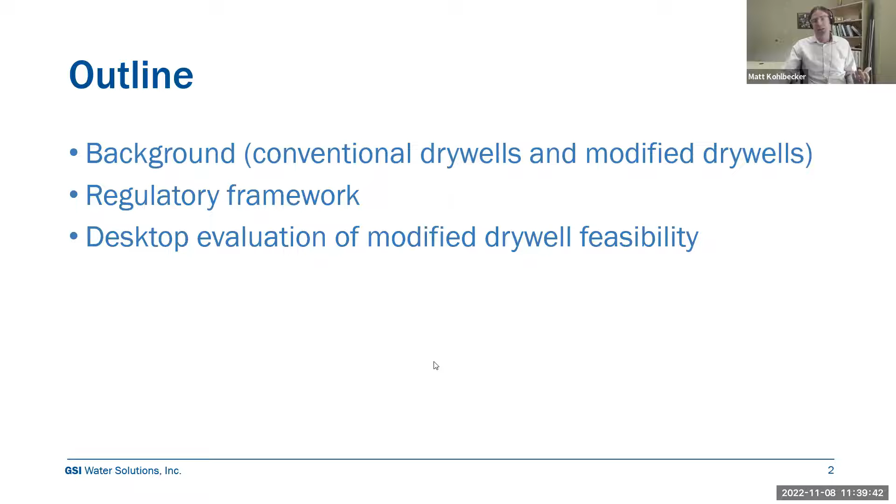I want to talk a little bit about the regulatory framework next. Whenever we're talking about modifying a drywell, let's think about what the regulations might have to say about that modification. Then we'll get into the meat of the discussion and talk about the desktop study that the city did to look at the feasibility of these modified drywells. And then we'll dive into the case study where they actually constructed one of these and had some success. Finally, we'll talk about conclusions and recommendations.

There are a couple of key characteristics when it comes to these conventional drywells. Number one is that they are a bit depth limited - again, 40 feet is about as deep as I see them.

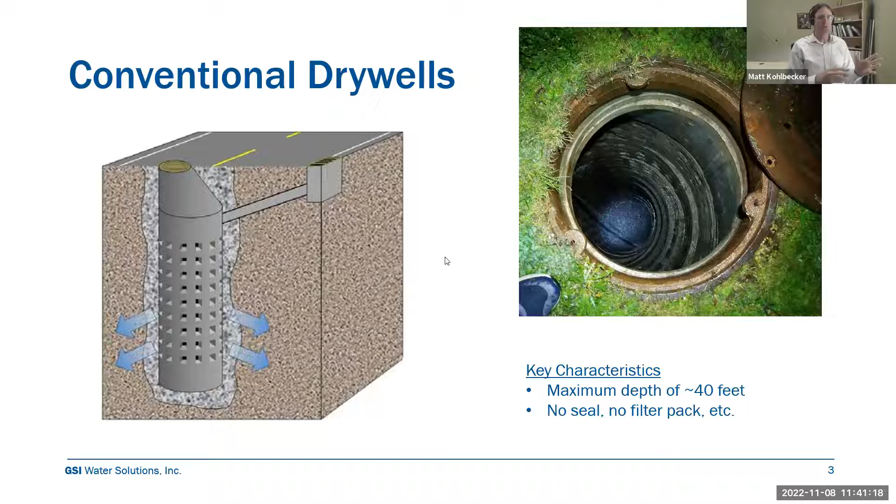And number two, these are basically concrete rings shoved into a hole in the ground. You don't get filter packs or seals or some of the more sophisticated construction techniques that we see around water wells.

So conventional dry wells are very common in the Pacific Northwest, especially out west as well. What we're looking at here on the left-hand panel is all of the public UICs in the city of Portland. The city owns and operates about 9,600 public UICs, and they estimate that for every one public UIC, there are 2 private UICs. So some quick math, we're looking at about 30,000 dry wells in the city of Portland.

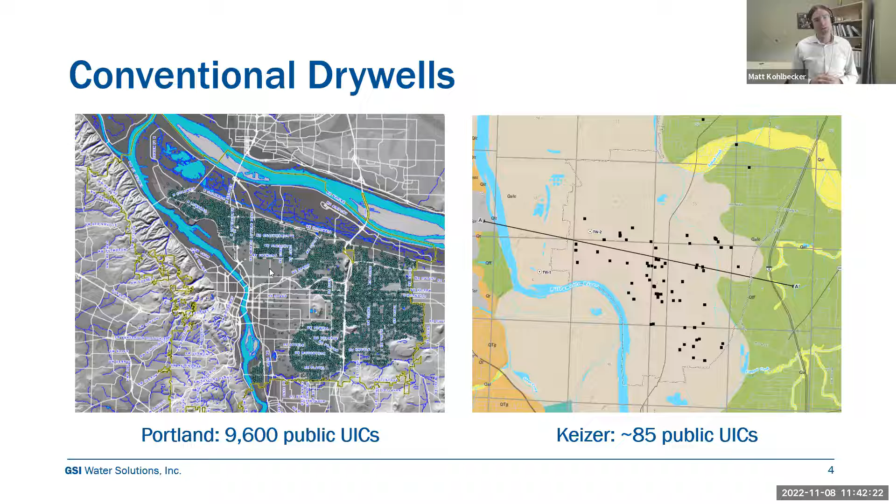But they're also used throughout the state. So the city of Keizer, a little bit north of Salem for those not familiar, has about 85 of these conventional dry wells. So very common. The conventional dry well works very well. Given our geology out here, we tend to have some very permeable gravels near surface, and most of the time you can stick one of these dry wells in. They tend to be pretty cost effective and solve your stormwater management situation at your site.

But conventional dry wells don't work in every case. There are some situations where these modified dry wells might make more sense, and one of those is shown. We're looking at a cross section here. This is down in the Pleasant Valley area of Gresham.

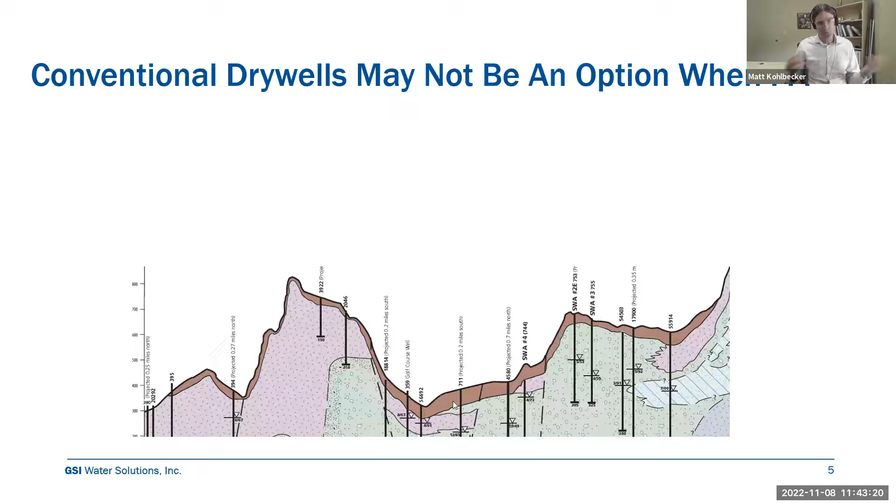This is south of the city where some new development was occurring. Basically the geology down there is some gravels and basalt capped by anywhere between 60 and 100 feet of low permeability silt. So stormwater management is a real challenge here. The LID doesn't work too well, and the conventional dry wells can't get through the silt because we can't get them deep enough. So this is a situation where if we have the ability to go deeper and tap these gravels beneath the silt, then we could infiltrate some of our stormwater.

And this was actually the situation where the city and I started talking about what maybe a modified sort of design would solve some of our challenges in this area.

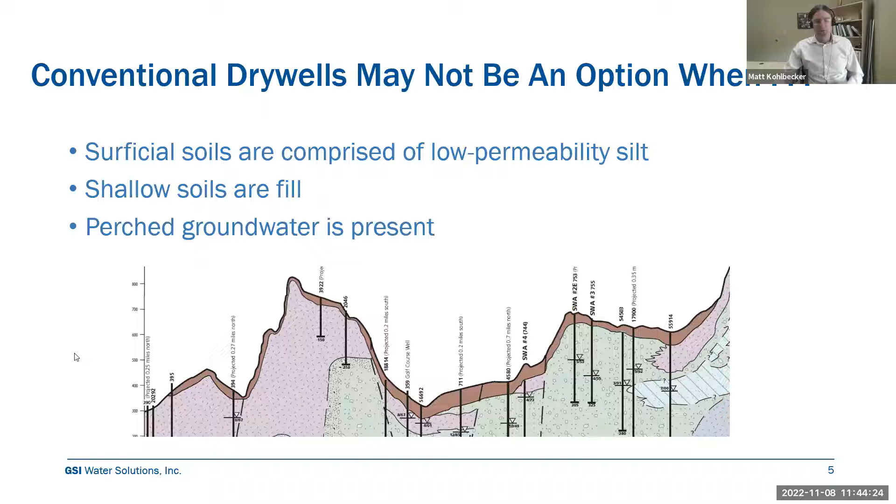Other times when conventional dry wells may not work: if the shallow soils are fill, there are some jurisdictions where there are prohibitions against infiltrating through fill material. And finally, if there's perched groundwater present, that also can be a situation where shallow or conventional dry wells don't work. We'll be talking a lot about that in the case study, so I'm not going to go into it too much here. I'll just pause for a second in case anyone had any questions.

All right, let's talk about modified dry wells. What do I mean when I say that? There are a couple of things. First of all, these are dry wells that are deeper than that 40-foot limit for conventional dry wells. And there are kind of 3 things that depth gets you. Number one, you're able to tap into deeper permeable gravels not present in those upper 40 feet.

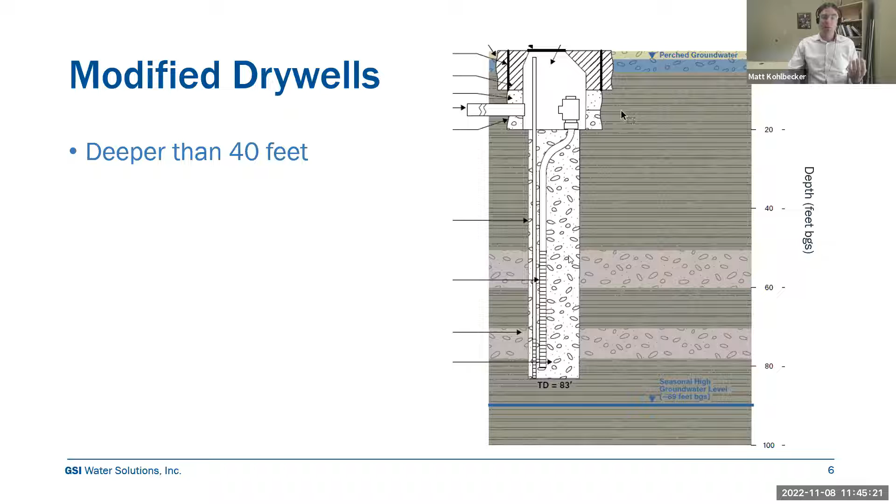The second thing these can buy you is you can bypass shallow perched groundwater. This is the situation in Gresham where we have some perched groundwater, and what we're able to do is seal that off and infiltrate into unsaturated soils below it. We'll go into more detail later. The third thing this gets you is you're able to generate more head, or create more head, in your dry well during infiltration.

So infiltration, the formula for that is Darcy's law. We have Q, which is your volumetric infiltration rate, and it's a function of your permeability, which is a property of your soil, the area — the area of your dry well, or the sidewalls and bottom of your dry well — and also this head gradient. So the more head you can build up in your dry well, the greater the exfiltration rate from the dry well. One quick caution I'd mention is that this is a theoretical relationship.

So there's not a one-to-one relationship between your head and your infiltration rate. There are efficiency issues that will tend to reduce your infiltration rate as your head is increased proportionally. But you can still get more infiltration with a higher head.

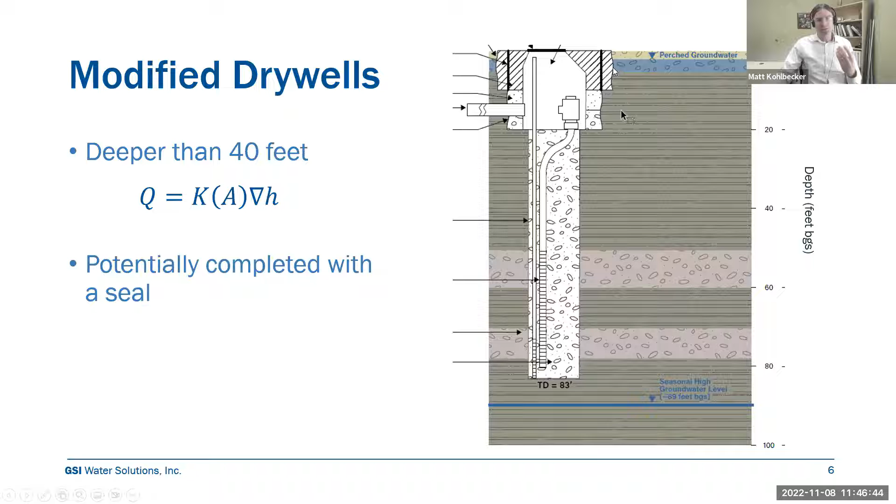Finally, or number two, when we talk about modified dry wells in addition to the depth, is this ability to put a seal in, which can seal off perched groundwater. So that's the background. I'll pause real quick here just in case anyone had any questions before we dive into regulatory framework.

Matt, there is a question. I don't know if you can see that. It says: what is the typical regulation, state or other jurisdiction, regarding pre-treatment before discharge into dry wells?

So that's a great question.

Could I answer that in about 3 slides from now? Sure, I promise I'll answer that. And I can't see the question, so thanks for reading that.

I appreciate that. Okay, so drywell regulation. The first thing, just as an upfront caveat, is that stormwater UICs that infiltrate stormwater are called Class 5 UICs under the Federal Safe Drinking Water Act. So everything I talk about today pertains to Class 5 UICs.

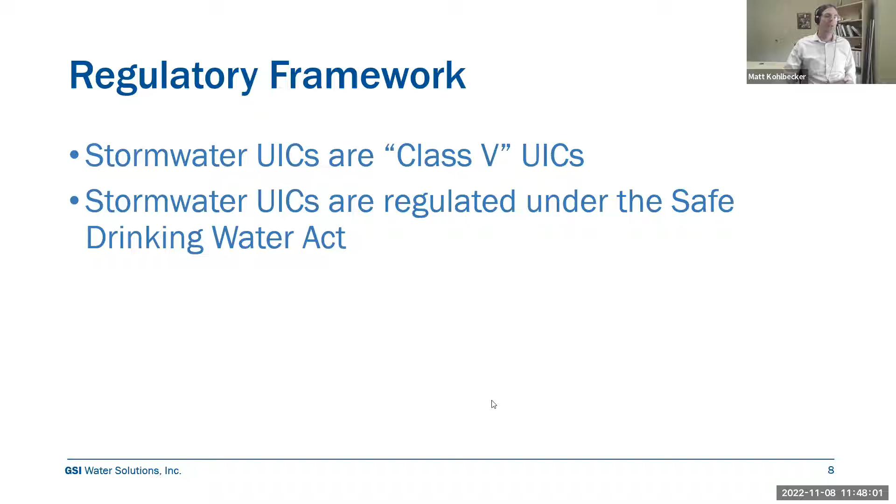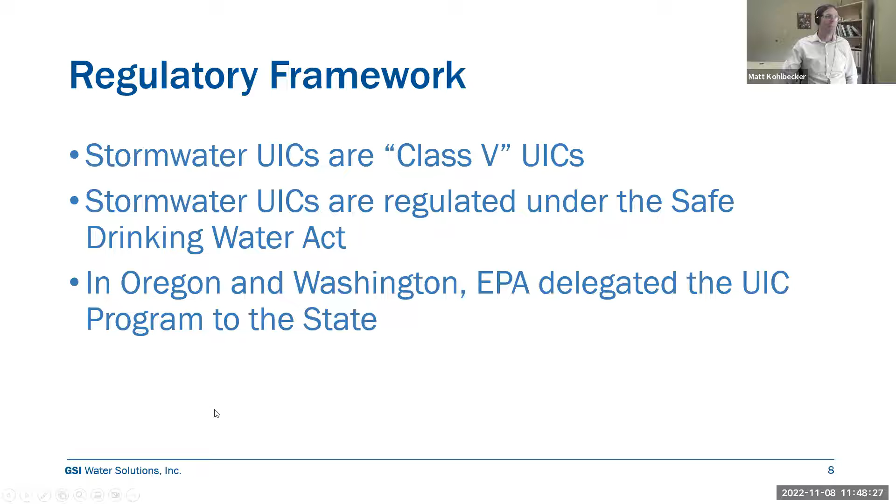These UICs are regulated under the Safe Drinking Water Act by EPA at the national level. However, in Oregon and Washington, EPA has delegated the UIC programs to the states, so Oregon and Washington have adopted their own UIC regulations. Oregon adopted theirs in 2001. Not sure about Washington, but you have to treat each state separately when it comes to the regulatory side. So first I'll talk about Oregon.

There are a few regulations to keep in mind when you're thinking about these modified dry wells. First of all, there's a depth limitation. The dry wells cannot be deeper than 100 feet. A little caveat to that is there are 2 ways to have a dry well authorized.

One is rule authorization. That's how 99% of UICs in Oregon are authorized. All that means is that your dry well meets the language of the Oregon administrative rules. If you're rule authorized, you're limited to that 100-foot depth. If you have a permit, then you could theoretically be deeper than 100 feet.

The permit, there are a handful of those, about 40 or so in the state. They're really tailored for jurisdictions and businesses that own several tens to several thousands of UICs. The application fee, I believe, is north of $15,000. So just figure you're going to probably be limited to 100 feet.

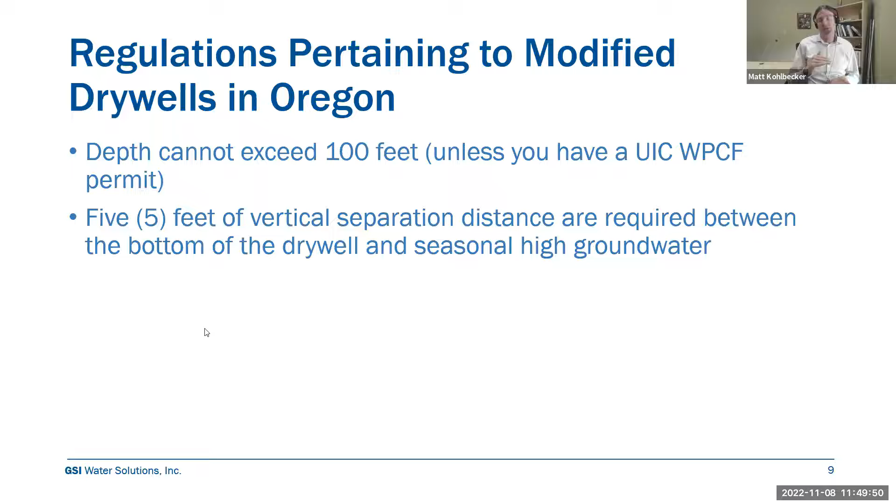Also, these modified dry wells need 5 feet of vertical separation distance between the bottom of the dry well and seasonal high groundwater. This also applies to conventional dry wells. And as with conventional dry wells, you cannot have a dry well located within a well setback, which is 500 feet or the 2-year time of travel for a water well.

Now I'll answer the pre-treatment questions. In Oregon, I think Kevin Weberling, who's the UIC hydrogeologist, I'd invite him to jump in if he wants. But I would say in general in Oregon, we don't have a prescriptive framework like you do up in Washington. Pre-treatment requirements are listed on rule authorization forms. It could be as simple as a sumped catch basin, or it could be as complex as bioswales and filters upstream of your dry well.

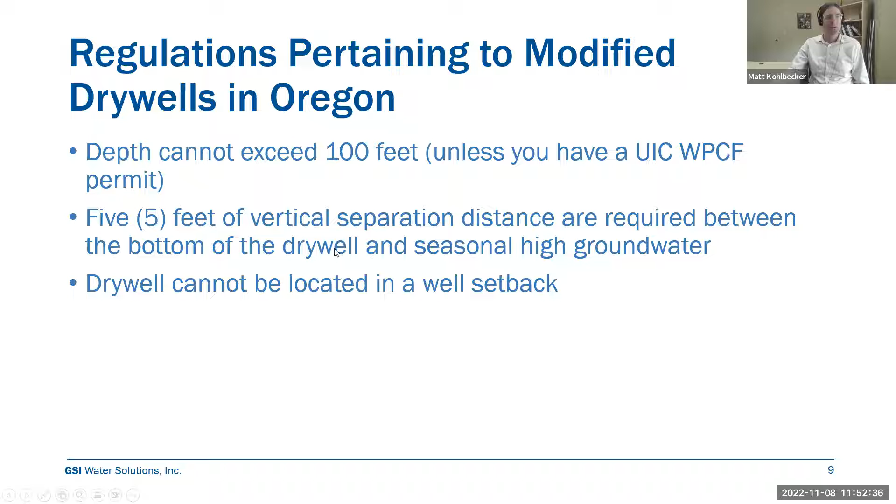Thanks for adding that, that's absolutely right. Okay, moving on to Washington. I'm going to kind of fake my way through Washington, it's a different state with a different set of regulations. If I were ever to do a project in Washington, I would be looking for someone to help me out, someone with local experience. I would characterize the regulations in Washington as more prescriptive, and these regulations are found in the Western Washington Stormwater Manual.

There's a hydrogeologic study that's required just to confirm that groundwater won't be contaminated. The vertical separation distance requirement is larger, so it's more than just the 5 feet, I want you to have 15. There are also some sealing requirements with regards to impermeable layers, and several other minor requirements. I think these are the big ones.

Okay, regarding pre-treatment in Washington, I'm probably not the best person to answer that. I am aware that it's much more prescriptive than it is in Oregon, and there are certification programs you have to be paying attention to. But like I said, if doing a project in Washington, I'd have someone else to help me out with this sort of stuff. So I don't know if that answers the questions or not.

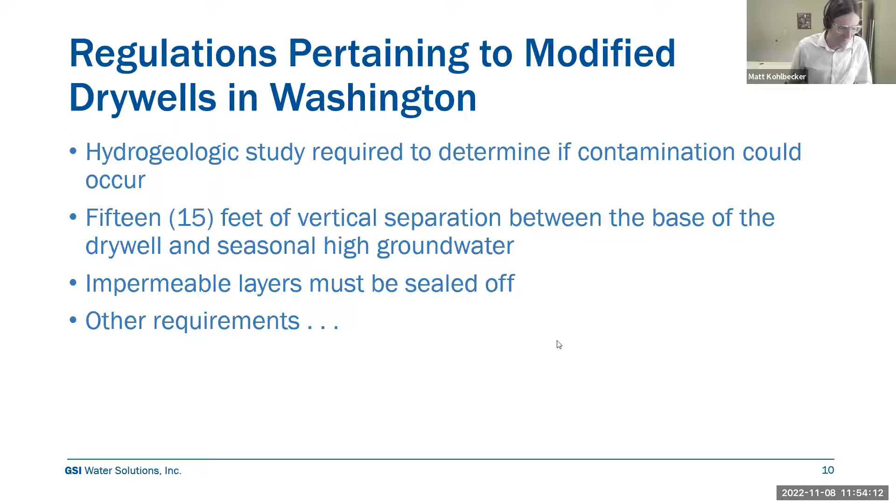Okay, so that covers their regulatory framework. Any other questions about that? All right, I'm not hearing anything.

So let's move on and talk about the desktop evaluation. The first step, really, before investing in this sort of dry well, is to do a desktop evaluation and assess: is this feasible, and what kind of infiltration rates do you think we could get? So I'm going to talk through that. There are really four components to the desktop evaluation that we did with the city.

We looked at the geology of their study area, and we'll talk about this a little bit later. Basically, the city had a study area where they had some challenges related to their MS4 capacity. So that's kind of where we were looking, and we looked at four things: the geology of that area, the hydrogeology—meaning the depth to groundwater in that area—and also the permeability of the subsurface soils.

We looked at regulatory aspects, and we also looked at cost aspects. And the outcomes of the desktop study are, like I said: number one, is it feasible? And what kind of infiltration rate do you think you'd be able to get?

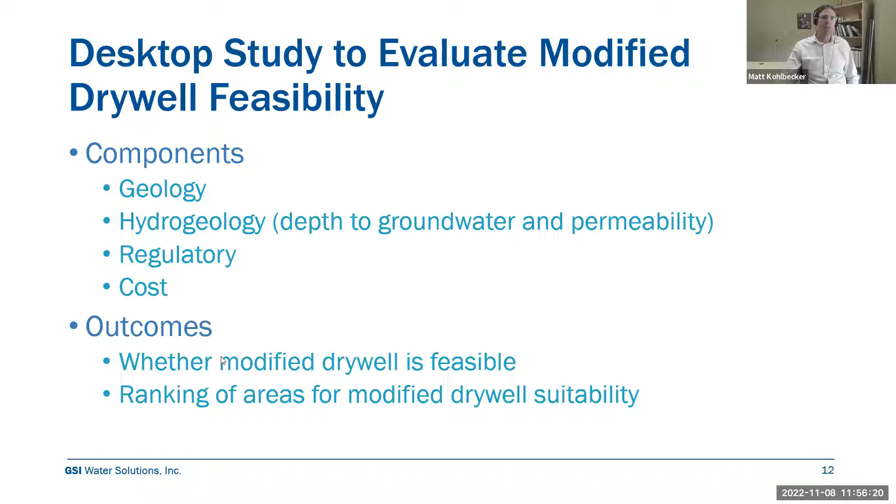So we'll step through this desktop study. This is the study area in Gresham, highlighted in yellow. And we have several dots and lines basically showing stormwater infrastructure. The green lines are the MS4 infrastructure within the study area.

You'll see we also have these diamonds—those are UICs. There's also LID in this area, which is not being shown. There are also several borings in the area, so the city's been kind of poking around here for a while, trying to come up with some infiltration solutions. So we had some actual site-specific data that we could use.

So what's the issue? The issue is that this MS4 system is basically at capacity and it needs some expensive, costly upgrades. So what the city was looking for is: are there other solutions that would be more cost effective that could allow us to handle or overcome these stormwater management challenges? As I mentioned, there are dry wells in the study area over here and LID, but they're not particularly effective because there's perched groundwater in the study area.

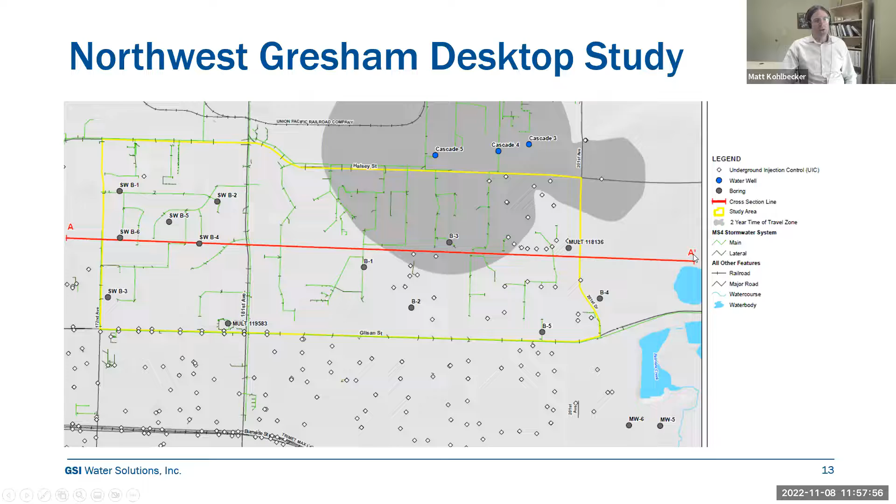So we're going to look at a cross-sectional view through the study area from A to A prime. And what we have in this area is two geologic units. We have the Troutdale Formation—gravels and silts, and other materials that came off the Cascade Mountains and out the gorge and were deposited a few million years ago. And then we have these flood deposits on top of those.

The flood deposits are, say, 15 or so thousand years old. Those came out of the gorge due to the bursting of an ice dam on Glacial Lake Missoula. The difference between these two units—why does this matter? Well, it matters because the Troutdale Formation is much older, highly weathered, and low permeability, whereas these flood deposits are high permeability and younger.

So what happens is water infiltrates into these flood deposits—partly from dry wells and also just infiltration from precipitation—and it accumulates on top of the Troutdale Formation. And so any dry wells that are being installed in this study area are basically completed in the perched groundwater, and they don't function very well.

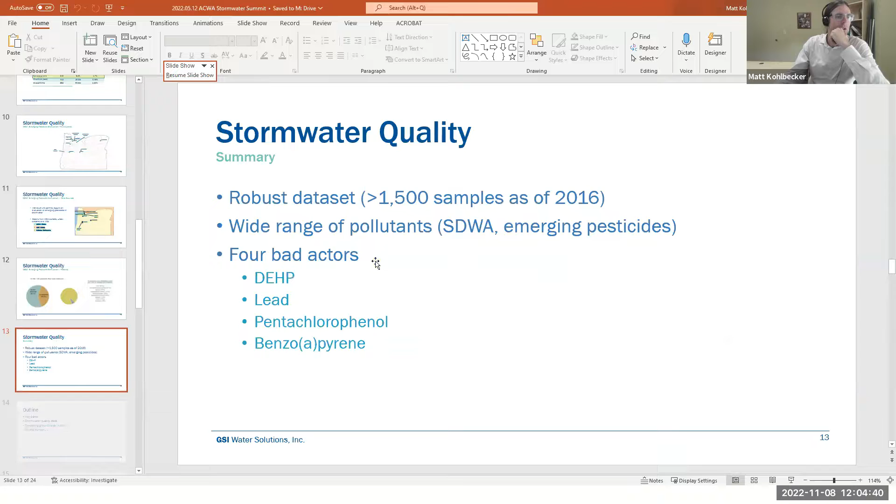Now, as far as data, let me see if everyone could bear with me for just a second. I have a few slides that review some of these—I just need to find that. This might be a good slide. Okay.

Let me talk about City of Portland first. There are about 4 or 5 situations where groundwater quality is being monitored down gradient of UIC areas to confirm that the anti-degradation rules are being met, and Portland is one of those. The city operates and owns monitoring wells completed in first encounter groundwater throughout its jurisdiction, and these are located down gradient of the UIC area.

I believe there are 8 of them, and the city's been monitoring groundwater quality in those since at least 2008. They sample for everything under the sun, and basically they don't see the pollutants that we find in stormwater in the groundwater. The pollutant in stormwater that is most mobile and most common is pentachlorophenol—it's a wood preservative on utility poles, so that's kind of the marker for stormwater. They've only seen one sample collected from one of these wells that had PCP in it; it also had some petroleum hydrocarbons and other stuff you don't normally see in stormwater. So there's something going on at that well, but it was a one-off.

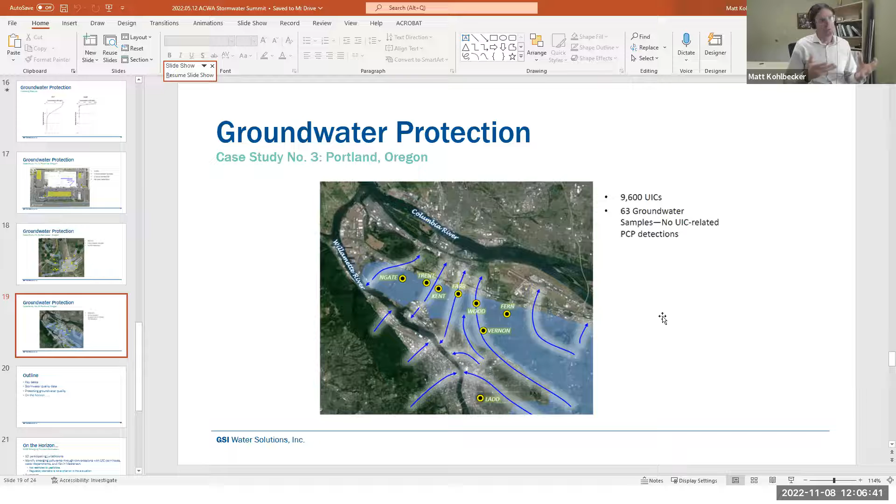I do want to caveat that for some of these wells, there is quite a bit of vertical separation distance, and I think the minimum vertical separation is about 20 feet. So that's the monitoring well network they have. Another interesting example I'll share is over in Hermiston. DEQ did a study of groundwater quality in Hermiston—I want to say that was in the early 2010s, maybe the late 2000s.

In this study, no PCP detections were found. So again, there was no evidence of stormwater from these UICs impacting groundwater.

I think there are a couple of reasons for that. Number one, the concentrations of pollutants in stormwater tend to be very, very low, so they tend to be degraded by bacteria in the subsurface, adsorbed to soils, and also have their concentrations reduced by dispersion. That's the main reason we don't see those impacts. But where we do see impacts, it's from spills, and I think that's a nationwide phenomenon.

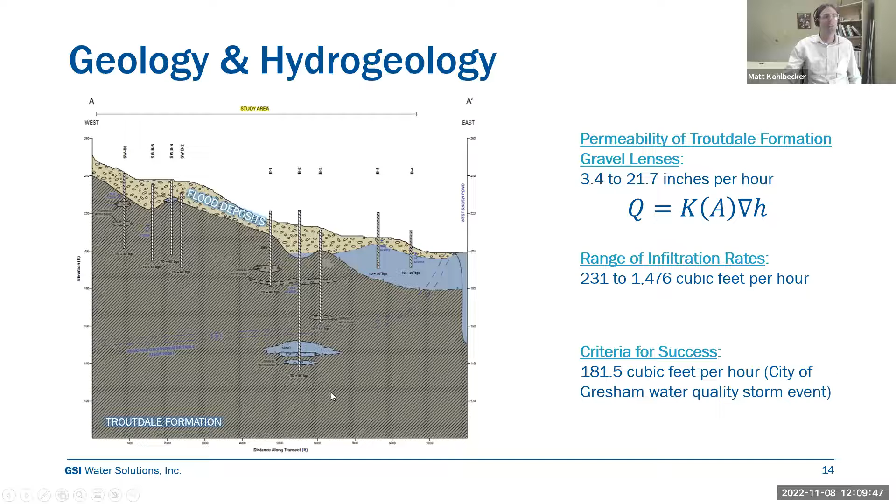So with this desktop study, we look at the geology and hydrogeology. We think we can meet our target of 181.5 cubic feet per hour based on the information that's out there. Another thing we look at is where in the study area we should put this. We came up with a relative map of infiltration potential, based on the thickness of unsaturated soils. We looked at the depth of groundwater and the thickness of the Troutdale Formation in this area, and came up with this map.

The thicker your unsaturated zone, the more area you have, the more water you're able to push out. The take-home message was that the depth to groundwater gets deeper as you move to the west. So if we stick a dry well over here in the west, we have the most unsaturated zone, and we're going to have the highest potential of hitting our target. So the drywell ended up going over in this area by SWB5.

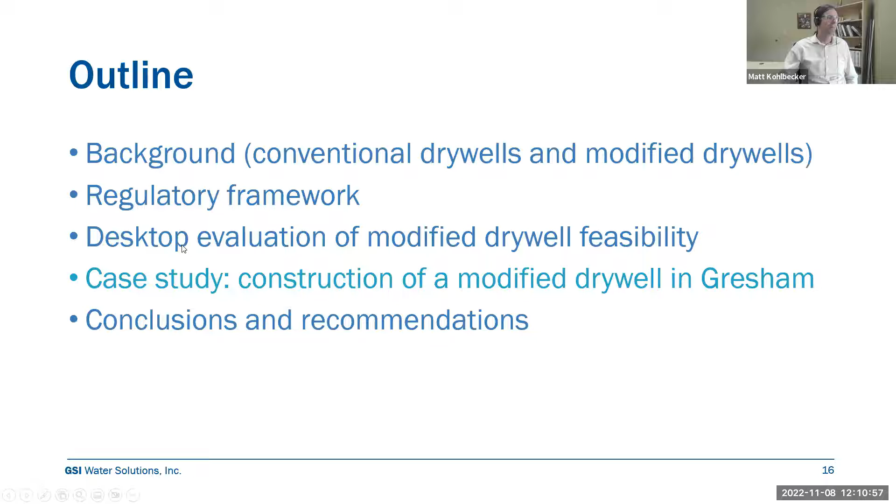Okay, so that's the desktop evaluation, and now I can go through the actual construction of the drywell. We looked at a couple different drywell design options. This design on both of these were bid—we developed bid specifications for the city, and contractors bid on both of these designs. The design on the left is actually a proprietary design that Oldcastle, formerly Torrent Resources, has developed. Catherine Thompson's on the phone, and she can chime in at the end in case I get any of this wrong. So that's one design, and another design we call the monitoring well design.

The big difference between these two comes down to storage volume. This is a 4-foot diameter lower borehole—they could probably even go bigger than that. There's a lot of storage in the pore space where water can slowly exfiltrate from those pores. Not as much storage volume in this design. The maximum size for this, while still being somewhat cost efficient, is about 32 inches. So not as much ability to store your infiltrating stormwater.

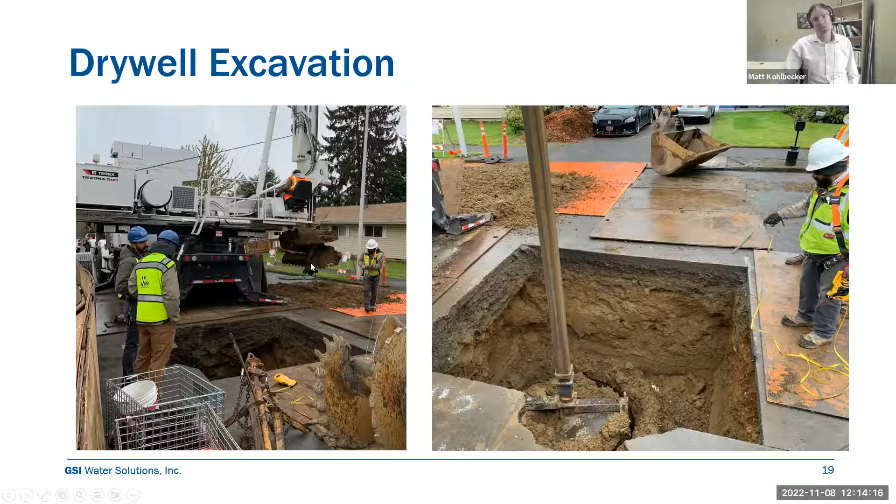This isn't going to work when you run into wet soils, so that's why we had to deal with the dewatering.

These are some of the soils that we saw. This is very typical Troutdale formation. You can probably tell from the photo that we have gravels here, but there's a very high content of fine material, highly weathered—you can see the iron oxidation. This isn't taking that much water. When you get a little bit deeper, though, we're at 60 feet here, with a much lower fines content, and this is one of those lenses where you really get your permeability and your ability to infiltrate water.

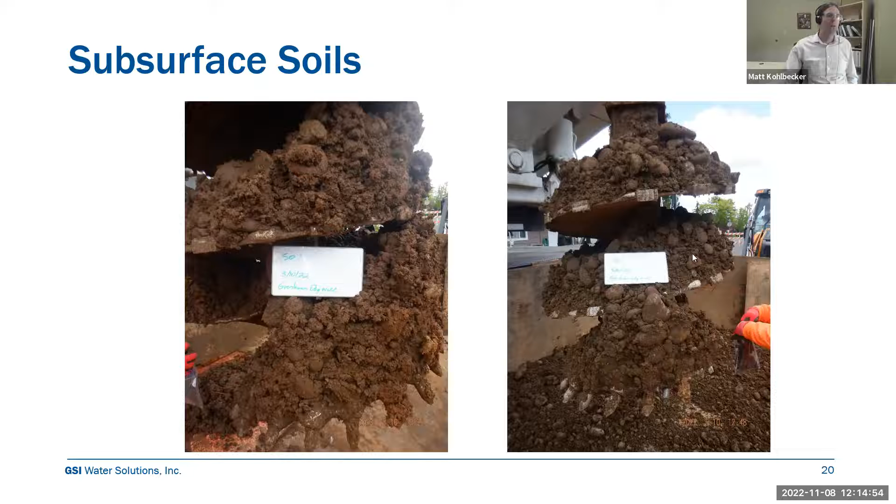Step one was to drill our upper 6-foot diameter borehole to about 20 feet below ground. That took us about 29 days—we ran into some equipment issues, so that's why it took a little longer than expected. Once we drilled that upper borehole, we keyed it into the Troutdale formation, since we had a nice good upper silt layer we could key the seal into. Then we put our pipe in and set the seal.

Once that is set, step three was drilling the lower borehole with 4-foot diameter augers, getting down to 66 feet. That took us 13 days to do. Then well construction was about 2 days—that's when we're actually putting the gravel backfill and the injection line into the dry well. Finally, we did our testing, which is on the next slide.

So here we are on our testing. We put a transducer in the well so we could record the water level elevation. City of Gresham standard testing protocol is to start the test at 300 gallons per minute. We knew we weren't going to get that based on the soils we saw, so we started off at about 200 gallons per minute and then decreased it down to 150, which is about where we calculated our stable flow level. Our calculated flow for this modified dry well is 1,428 cubic feet per hour, which exceeds the target by quite a bit. So it was quite a success. I do need to caveat that that's a raw flow rate—it doesn't have any safety factors, and it does not account for decreased performance over time. But yeah, quite a success.

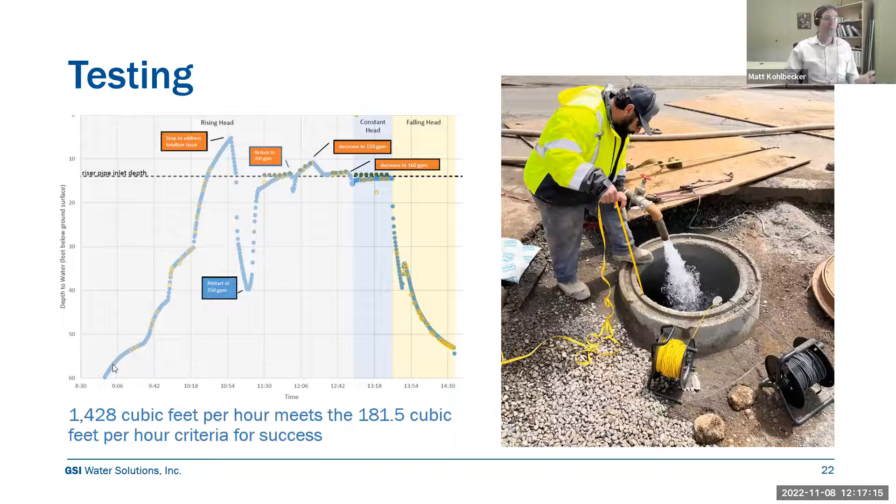Matt, just a quick question came in—sequentially, where this might fit in. There was a question that said in Washington, UIC wells have been built before they have been registered. In some cases it involved a denial of the rule authorization. Is this a problem in other states as well?

So in Oregon, the regulations also require you to receive your rule authorization before constructing the dry well. Carry on—thank you. Yeah, and it's a good idea because that way you minimize issues like construction of a dry well that then doesn't meet rule, and then you're having to figure out how to handle that.

So I have a quick slide on groundwater quality protection. At GSI, we work mostly with municipalities—that's our client base. A lot of times, especially with smaller cities, the stormwater folks are sitting right down the hall from the folks providing drinking water using groundwater as a source. So I like to approach these deeper drywell projects with groundwater quality protection in mind.

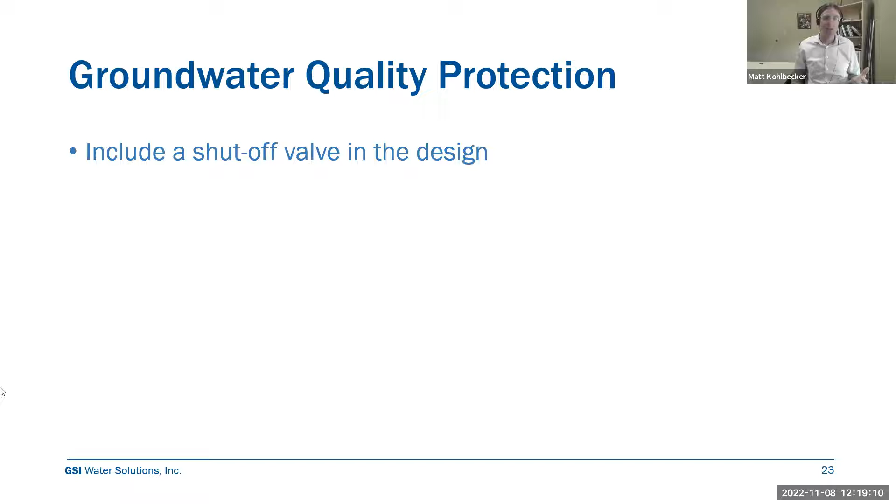And there are a few things that I recommend, and the city went ahead and did these. Number one is to include a shutoff valve in the design, so if there's ever a spill or something like that in the area, you can shut off flow to the dry well.

Number two, and I think this is the most important one, I think these things are best used on low traffic streets. When I say low traffic, I mean less than 1,000 trips per day, because the pollutant loads are much less on low traffic streets. The city of Portland has collected over 3,000 stormwater quality samples from UICs over the past 15 years, and it's remarkable the difference in pollutant concentrations between streets with less than 1,000 trips per day and those with greater than 1,000 trips per day.

At residential streets there's lower potential for spills. I suppose oil dumping is still going to be more of an issue on residential streets, but that oil doesn't tend to move too much in the subsurface. So in the context of groundwater quality protection, I'm more worried about things like tanker trucks and gasoline solvents, which you're largely avoiding when you're over on the low traffic residential streets.

Two quick things, Matt. There are two questions. One says, hi, this is Ann from Oldcastle, just a heads up that Catherine Thomason had to leave the meeting, but I'm happy to answer any Maxwell Drywell questions that come up. The other one was, what does he mean by a shutoff valve on the line from the CB?

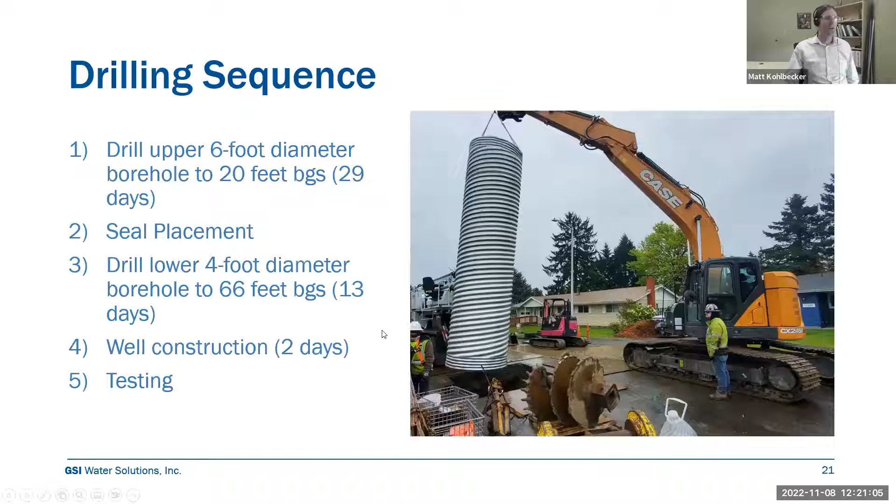But to your point, questions about could you put it on the catch basin inlet, that would seem just as good a place as any to put it. I guess you'd want it to be some easily accessible place, you could train people how to get to it and all that good stuff. So does that answer your question? We'll see if they respond, if there's other feedback. It said, thank you, still scratching my head a little bit though, but good. Okay, we'll take it.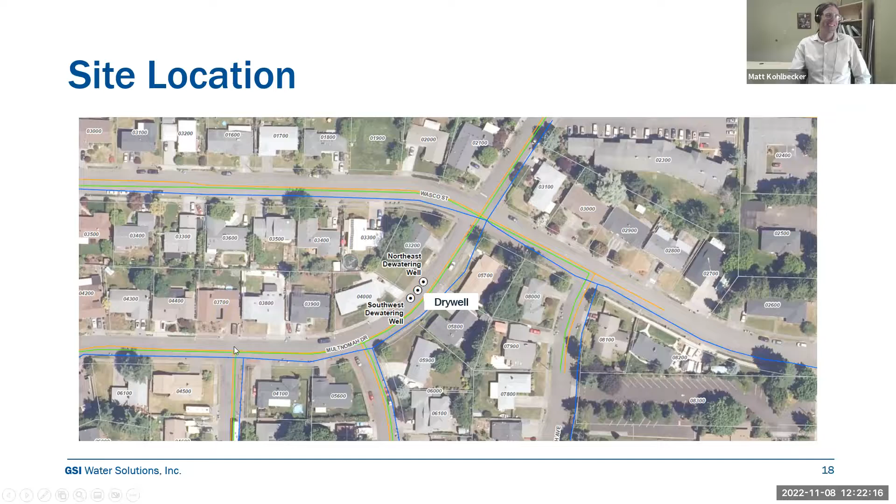There's another one here. That is, how large of a drainage area does the one UIC serve? What is the estimated lifetime of the UIC and the cleaning frequency? I do not know what the catchment area is for this dry well. So cleaning frequency, I also don't know that, but that's one of our recommendations.

So again, this is the dry well that was constructed, and we have a drop pipe in here that monitors the water level in the dry well. What the city is going to do is install a dedicated pressure transducer that basically monitors the water level. By monitoring that water level during subsequent storm events, they'll be able to track dry well performance over time, and that will inform cleaning and rehabilitation frequency. So that's the idea.

I can tell you from the water well world, and I'm not sure if this is applicable to the dry well world, but the rule of thumb in the water well world is when you see a 25% performance decline, then you start thinking about rehab.

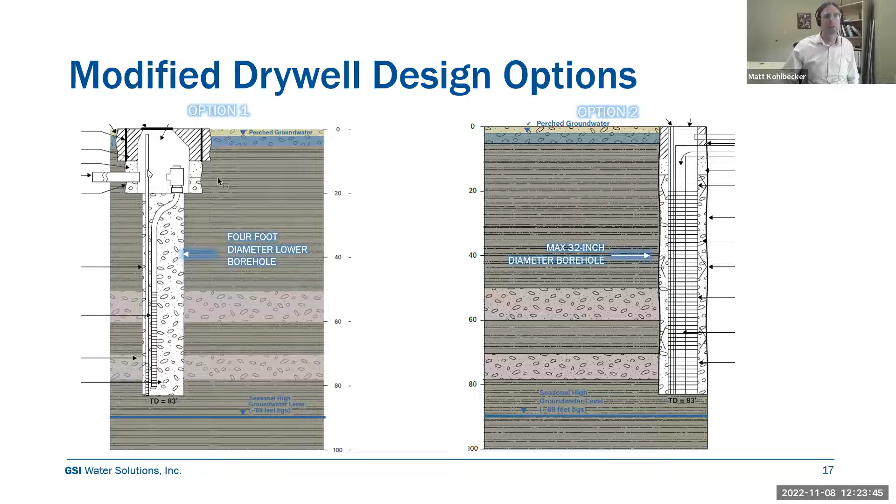Here's another question while you're continuing, another one from Amy coming via email. Question about the seal for the modified UIC. Is it the galvanized pipe that is the seal, or do you have a seal within that pipe? What happens when the galvanized pipe degrades over time?

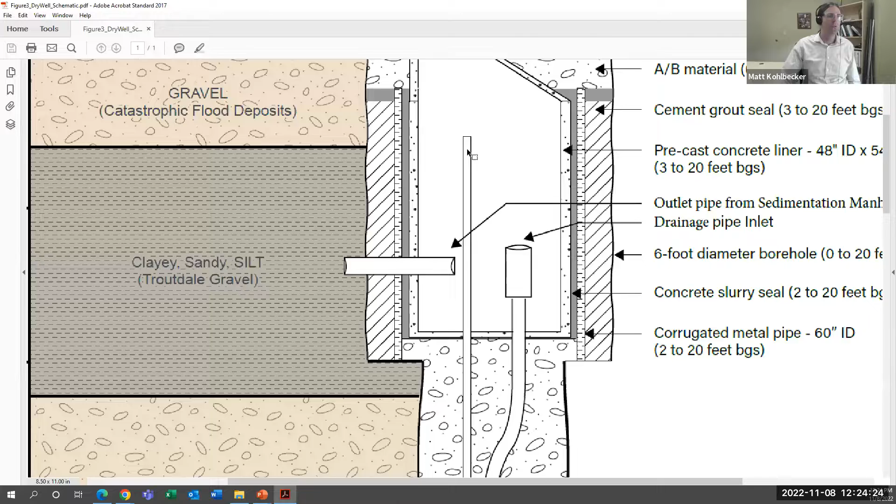Yes, let me show you a little bit better picture here. So what we do is, the galvanized pipe is this symbol here, if I'm highlighting that correctly. I have to apologize that I'm still finalizing this figure, so I've got a couple symbols to correct. But basically what you have is cement grout on the outside of that galvanized pipe and on the inside. So basically the seal is the cement and the galvanized, and it completely surrounds the galvanized, and that's basically a coating to protect from corrosion.

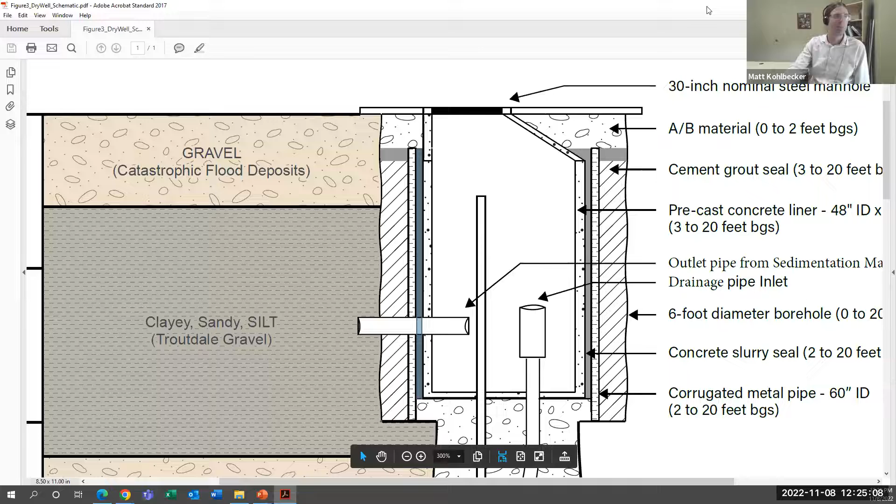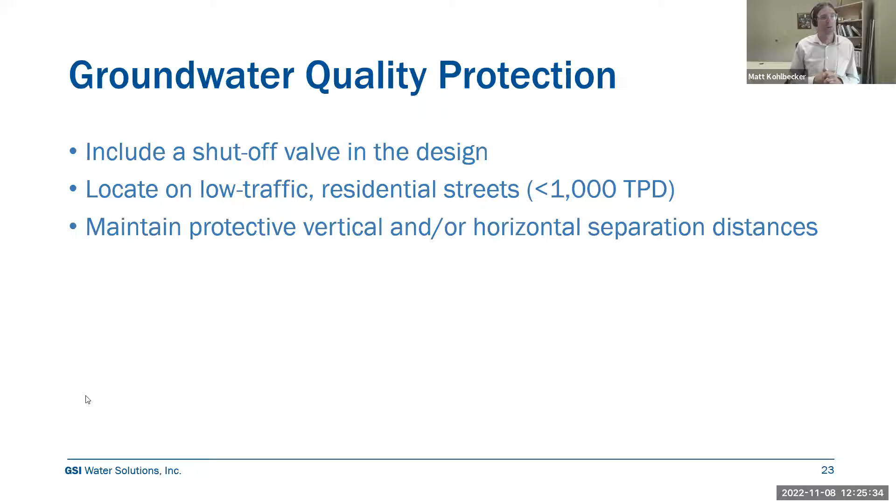Okay, groundwater quality protection. What else? I find this kind of goes without saying, but to maintain your protective vertical and horizontal separation distances. That 5 feet of vertical separation in Oregon has been demonstrated by modeling studies, showing that with those 5 feet, pollutant concentrations will decline to zero by the time they hit groundwater. Again, it's a function of the low concentrations of pollutants in stormwater.

Here was a follow-up too. Is zinc from the galvanized steel an issue with stormwater infiltration?

Let me bring this up. I don't think so, because what we have is the galvanized pipe right here, surrounded by the bentonite, and then this is a concrete chamber right here. So the stormwater comes in through here, into the concrete chamber, and then it overflows into the injection line here. So we've got concrete, PVC, PVC, PVC. So there's really no contact with any zinc from the galvanized during infiltration.

If that makes sense. Yeah, I think so. And I think there's some pretty good chat going on. I don't know if you're able to see that now, Matt, but I've tried to adjust some settings.

Tori had mentioned none of the zinc on this pipe should be exposed to water. And then Rick Hansen had suggested, please go to the last slide again with the recommended parameters on it, like less than 1,000 TPD, et cetera.

For the groundwater quality protection? I'm going to say yes, but I can't confirm that. And then Rick said, yeah, that's fine. So I think you're good there.

Another question from Craig P: Can you legally infiltrate into several aquifers separated by an aquitard, as long as infiltrating above seasonal high water table?

Well, that gets into some uncertainty with the regulations. If I could recast this question, I would recast it as, can you infiltrate into a perched groundwater? And the answer would be maybe. I think in this situation in Northeast Gresham, you could, because it's a very localized perched groundwater and nobody's using it for drinking water purposes. That's kind of what this gets down to: is that perched groundwater a source, an underground source of drinking water? For that particular situation, I think the answer would be no.

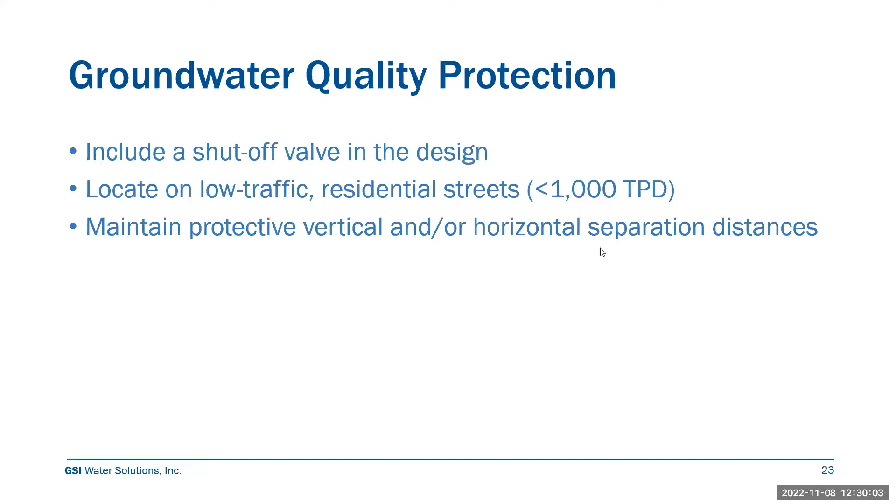Okay, go ahead, carry on. I don't see anything else yet. All right, well yeah, I'm on my last slide.

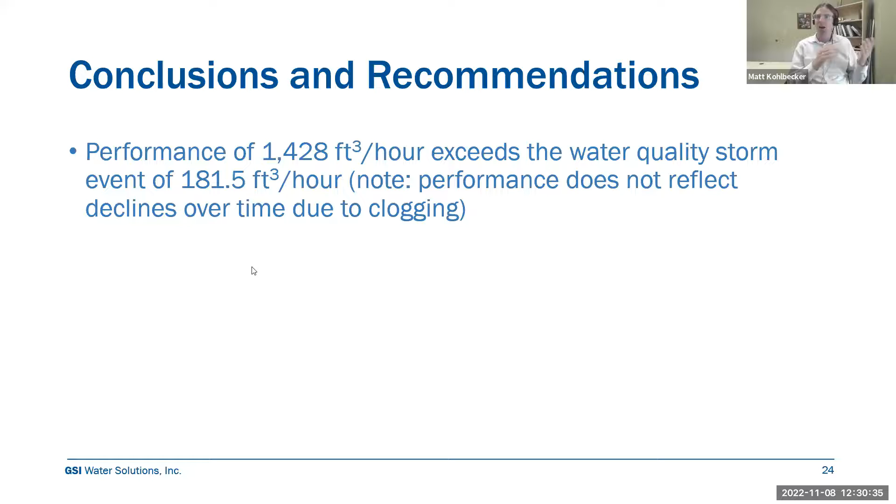So conclusions and recommendations. I think first of all, the performance we measured exceeded our target by quite a bit, so that was great news. Again, this is not your long-term sustainable performance or injection volume. This is a raw rate, no safety factor, and it doesn't account for declines in performance over time. But I like where we are right now, and we'll have to see how that changes over time. That's kind of the next big question.

Second recommendation that I talked about briefly was to instrument this with a pressure transducer to track water level rise over time and to monitor. Basically what you're doing is monitoring performance over time.

And another recommendation I thought of is, if you are doing stormwater quality monitoring as part of a permit, to include this modified dry well in that program, because this is preliminarily a success. We'll see if it holds up over the coming years, but those stormwater management challenges in this area are still there. I think it would be helpful to have additional confidence in the stormwater quality in the area when you start thinking about expansion of a drywell, modified drywell program in this area.

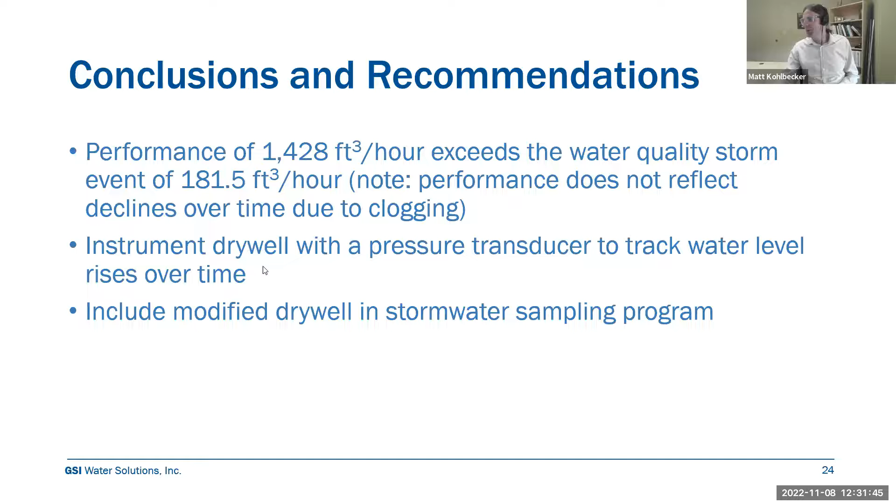Okay, a couple more. Oh boy, the cost question. That's a really good question, and I wish I had an answer for you.

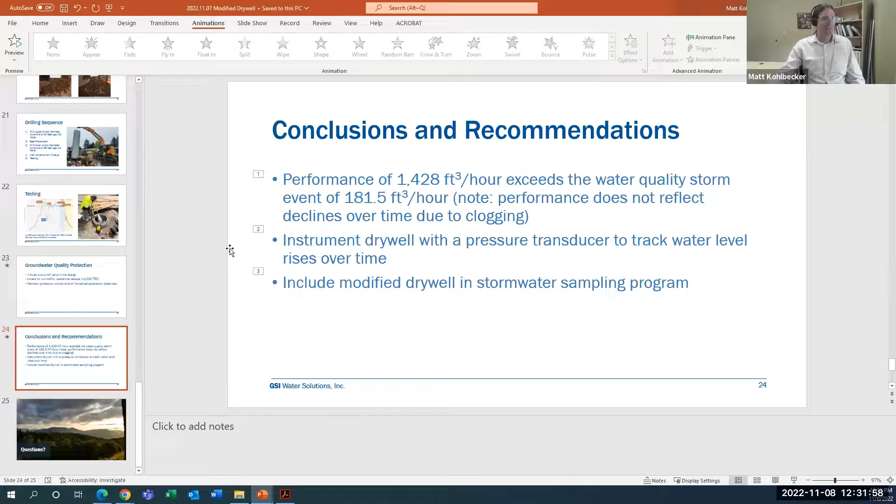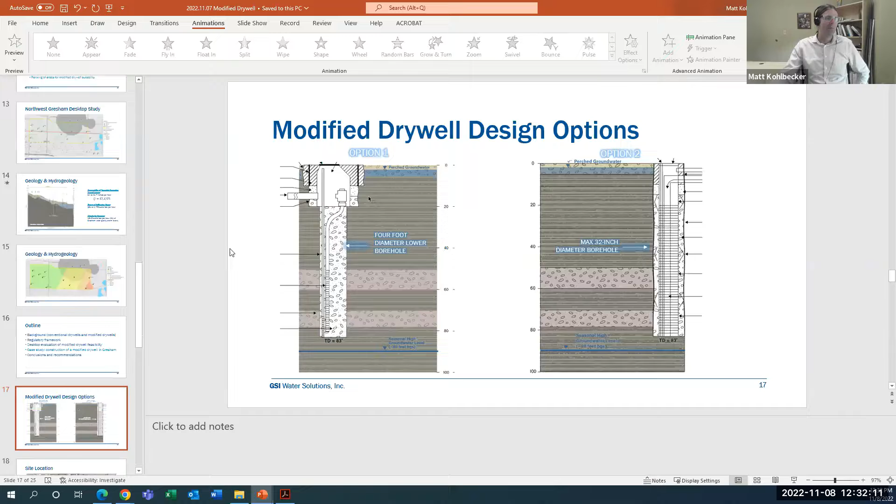Let me answer the construction and testing timeline. Here's our construction timeline. And Rich, if it's okay with you, what I might propose is I could maybe get back to you about the cost. I would need to talk to the city and just confirm.

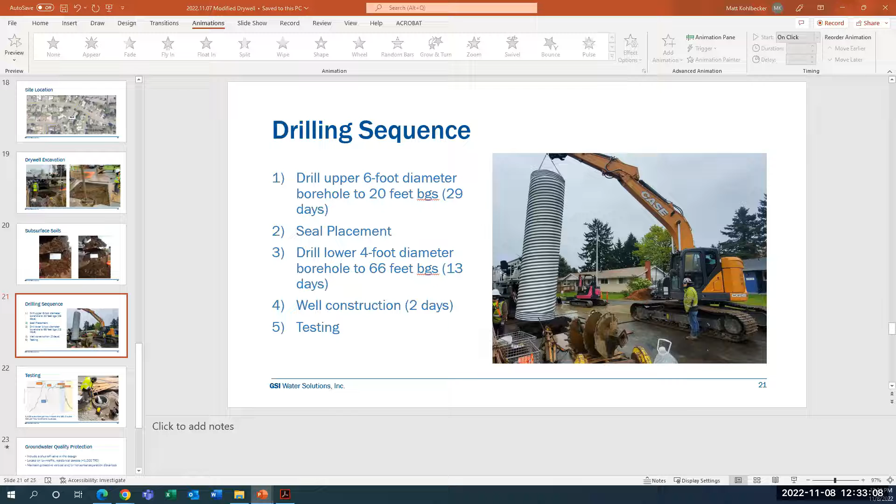Yeah, great. It says Ann mentioned she can answer costs generically. Do you want me to go ahead and make Ann live? And while I'm pulling that up, what are the main contaminants that PDX has found in their UIC water quality monitoring program? Sure, how about I take contaminants first, and then Ann, we can kick it over to you.

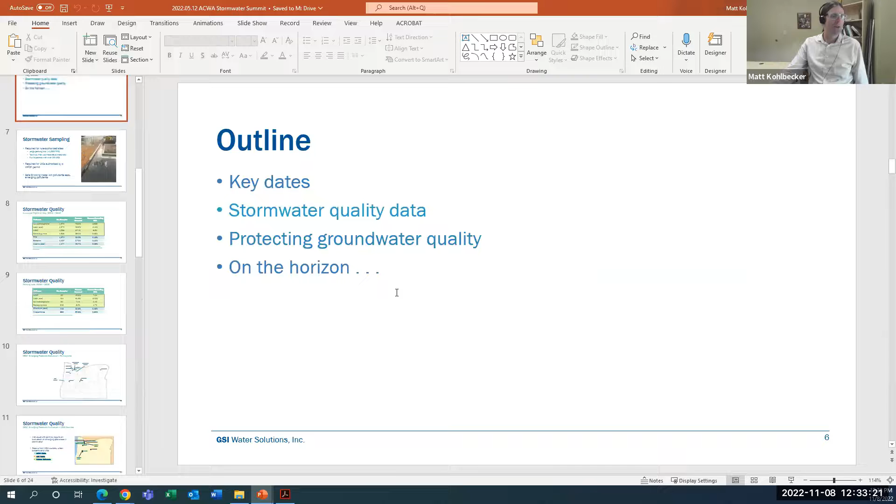And we have these four bad actors that tend to exceed MCLs in basically more than 1% of samples. That's pentachlorophenol from the utility poles I mentioned earlier, lead, which is ubiquitous in the environment, DEHP, which is also ubiquitous - that's a phthalate - and benzo(a)pyrene, which is from incomplete combustion of hydrocarbons, basically vehicle traffic. So these are the four that we see showing up quite a bit in the municipal stormwater. And the pentachlorophenol is by far the most mobile of these, so that tends to be the risk driver.

Okay, I've made Ann able to talk, and there are a couple more questions. So Ann, if you can hear this, looks like you are able to talk. Great, thanks, Greg. Can you hear me? Yes. Perfect. Well, I just wanted to give input generically on the cost of our Oldcastle Maxwell deep dry wells.